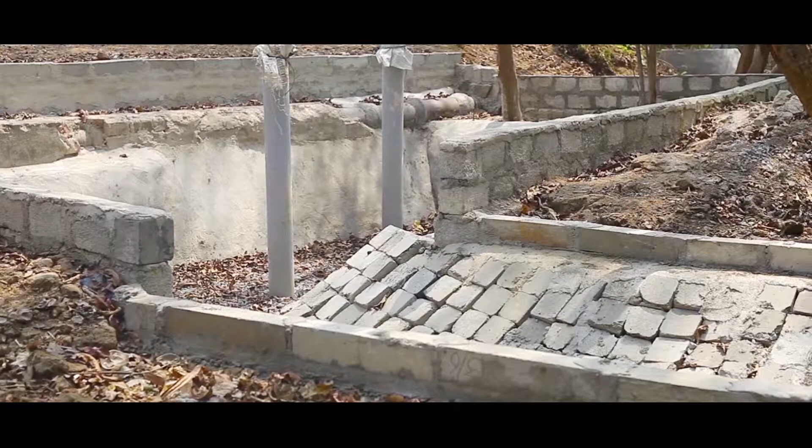Water, water everywhere, not a drop to drink. Isn't this what we feel after the rains? Puddles and water-filled potholes only make us wish that we could make use of the precious water. Actually, we can. Rainwater need not be wasted.

Rainwater harvesting is the best way for using the rainwater. In the last decade or so, the distribution of rainfall in many parts of the country has been erratic and uneven, which causes water scarcity conditions in many parts of the country, due to which water is not sufficient for drinking, household, agriculture, industries, and other purposes. Also, the groundwater levels in many states have been depleting.

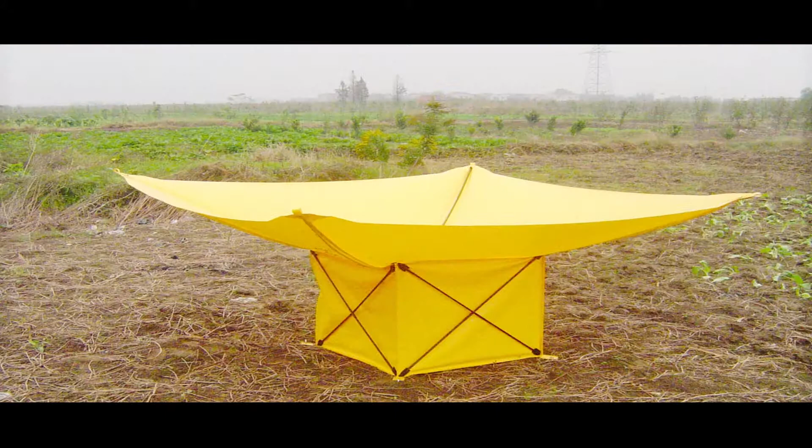We cannot produce water, but one thing is possible: that is to harvest the available rainwater, preserve it, save it, recharge it, conserve it, store it, and use it after proper treatment.

As we are all aware, 18% of the world population is in India, but we have only 4% of water resources. Whereas if you take into consideration the utilization of water, more than 30% of the water is being utilized in India. This, if you take into account, is a huge utilization in India.

Because of urbanization, industrialization, and explosion of the population, the pressure is on the water resources, more particularly the groundwater resources.

Mostly our huge resource available, the largest resource available in the world, is groundwater, but utilization day by day is increasing tremendously. The pressure is very high on groundwater.

Because of overutilization and excess utilization of groundwater resources, there are two kinds of problems arising out of it. One is the declining groundwater levels, and the other is the deterioration in quality of groundwater.

Because of these problems, the Ministry of Water Resources, Central Groundwater Board, is taking up so many artificial recharge structures to control the groundwater level decline and improve the groundwater quality. In this regard, during the 11th plan period, 100 crores has been allocated for demonstrative artificial recharge in rural and urban areas.

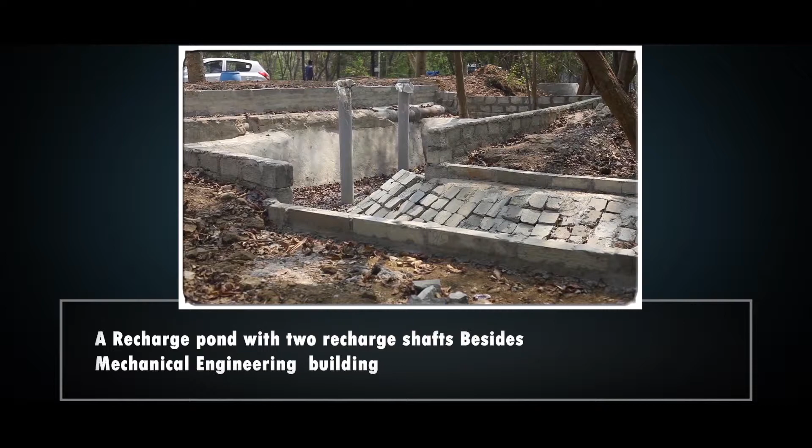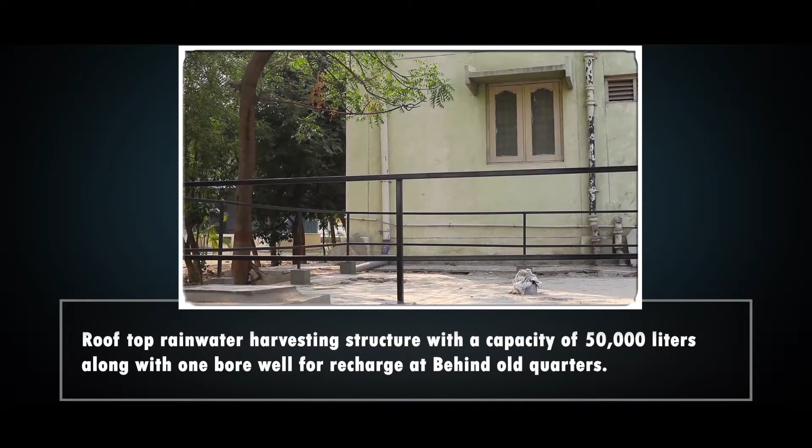Under this project, we have constructed 10 rainwater harvesting structures in the university, including 3 piezometers: a recharge pond with 2 recharge shafts beside the mechanical engineering building, a rooftop rainwater harvesting structure with a capacity of 50,000 liters along with 1 bore well for recharge behind old quarters, and another rooftop rainwater harvesting structure with a capacity of 50,000 liters along with 1 bore well for recharge at new quarters.

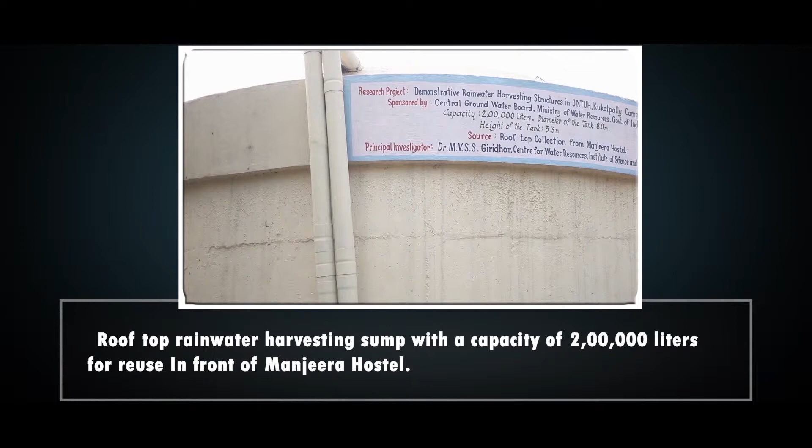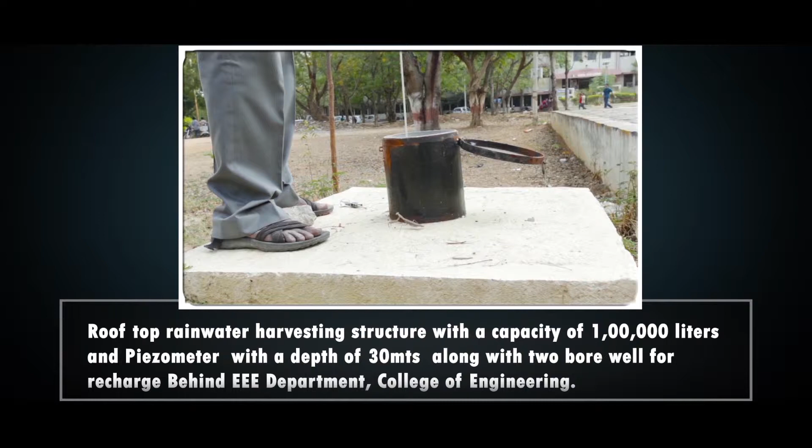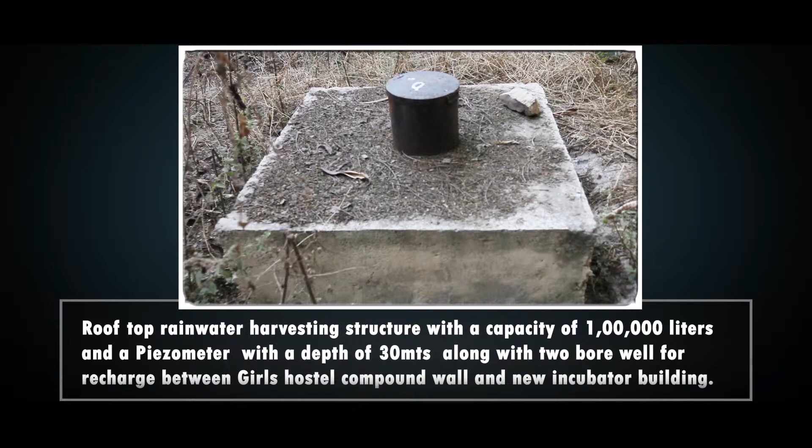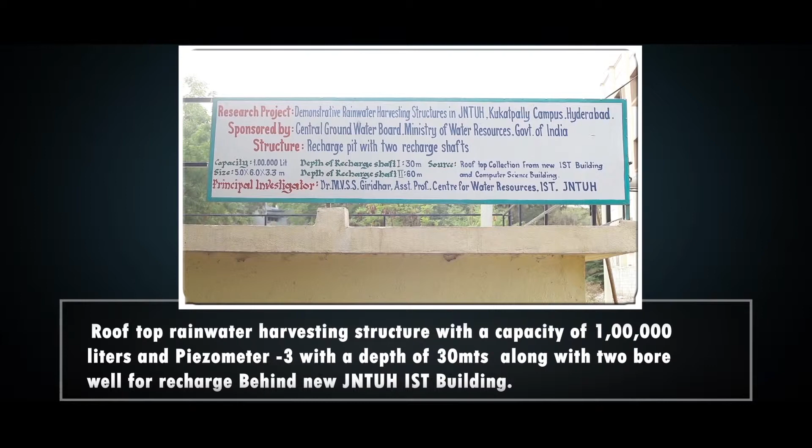A rooftop rainwater harvesting sump with a capacity of 2 lakh liters for reuse is located in front of Manjeera Hostel. A rooftop rainwater harvesting structure with a capacity of 1 lakh liters and a piezometer with a depth of 30 meters, along with 2 bore wells for recharge, is located behind the EEE Department, College of Engineering. Another structure with a capacity of 1 lakh liters and a piezometer with a depth of 30 meters along with 2 bore wells for recharge is located between the Girls Hostel compound and new incubator building. A similar structure with piezometer 3 at a depth of 30 meters along with 2 bore wells for recharge is located behind the JNTUH IST building.

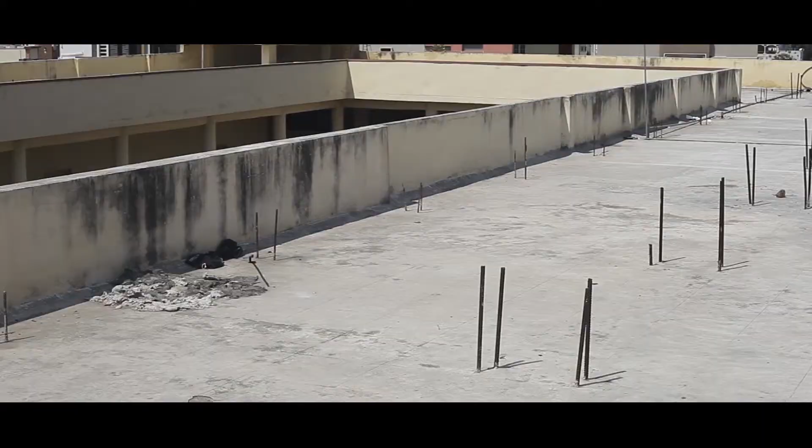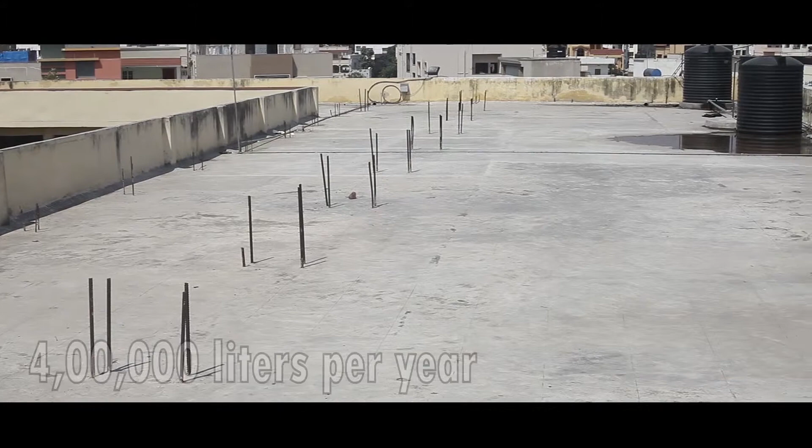Manjeera Boys Hostel building has a rooftop area of 620 square meters. The rainwater falling on the roof of this hostel is directed to the circular storage tank of 2 lakh liter capacity. The rainwater available from the roof of the building alone is about 4 lakh liters per year. The water is made to flow through PVC pipes of 4-inch and 6-inch diameter into the tank.

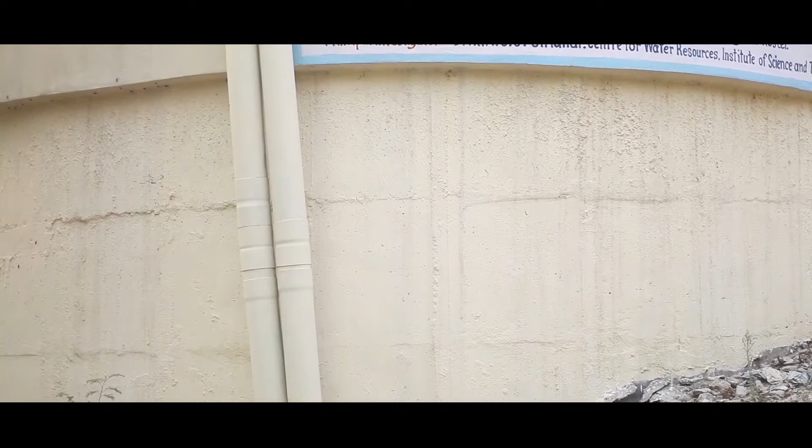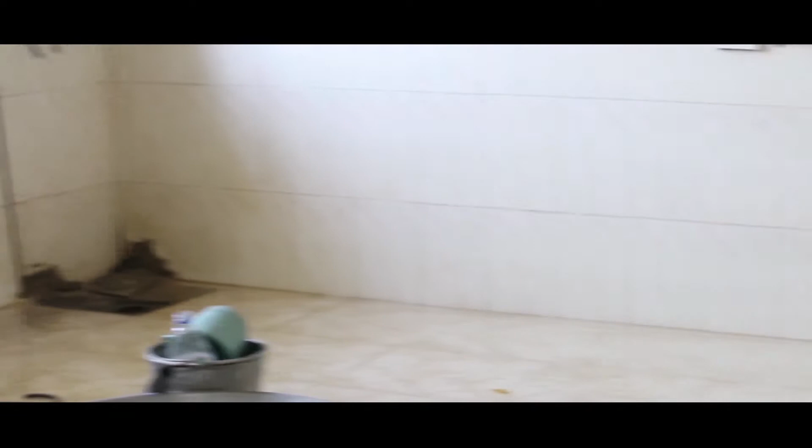A proper filtration system has been made at the inlet point of the storage water tank. The water stored in the tank is used for domestic purposes of the students residing in the hostel.

Technical specifications of the 2 lakh liter structure located in front of Manjeera Hostel, JNTUH campus: Capacity of the tank - 2 lakh liters. Diameter of the tank - 8 meters. Height of the tank - 5.3 meters. Rooftop area - 620 square meters. Maximum rainwater that can be harvested in a year - 4 lakh liters. PVC pipeline used - 4-inch and 6-inch diameter.

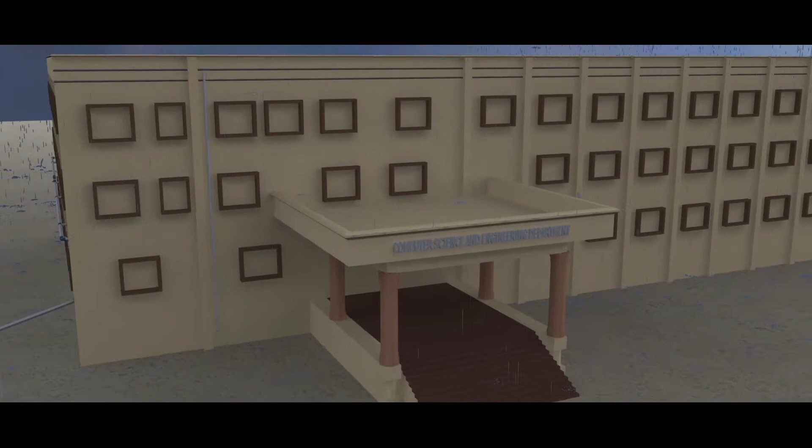Rainwater falling on the roofs of 11 buildings situated in the university campus is collected through PVC pipes of different diameters through telescopic design. After proper filtration, water is allowed to store in the sumps. In each structure, recharge wells are established in the sumps to inject water into confined and unconfined aquifers directly.

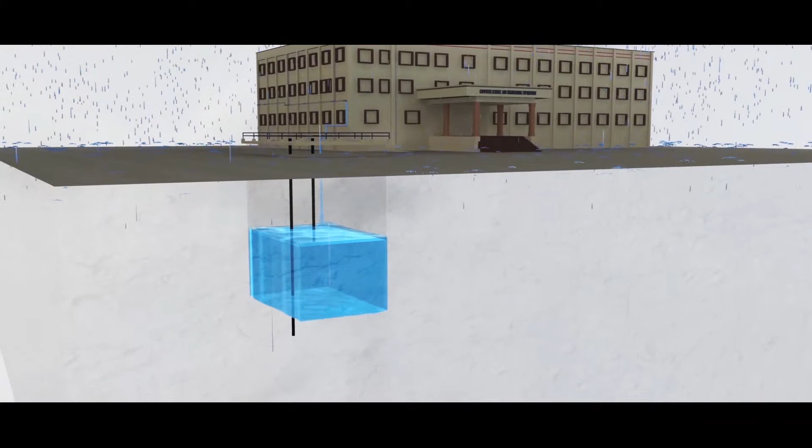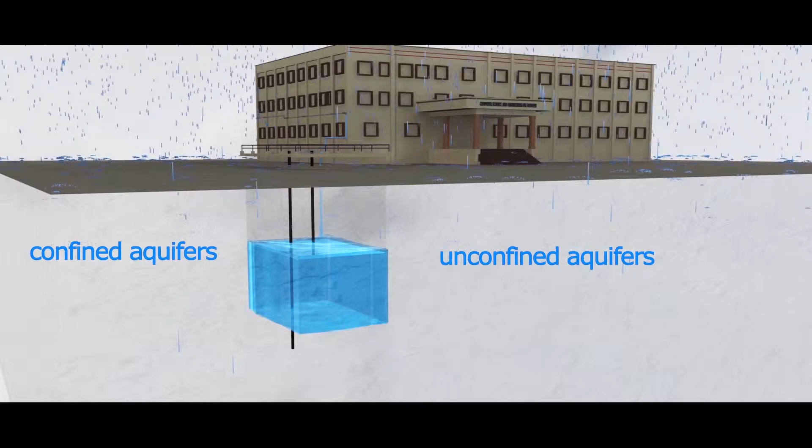The diameter of the recharge shaft is 200 mm. These wells are used to recharge both confined and unconfined aquifers situated at various depths below the ground surface. These recharge shafts are more beneficial for deep depleted aquifers and also where economy of space is an important criteria.

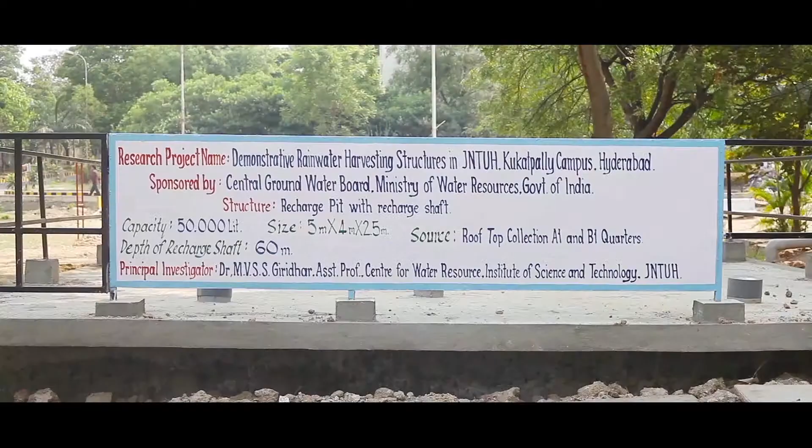A total of 5 rainwater harvesting structures were established in the campus in Phase 1 and Phase 2 of the project for recharge purposes. The technical details about these structures are explained in the following video.

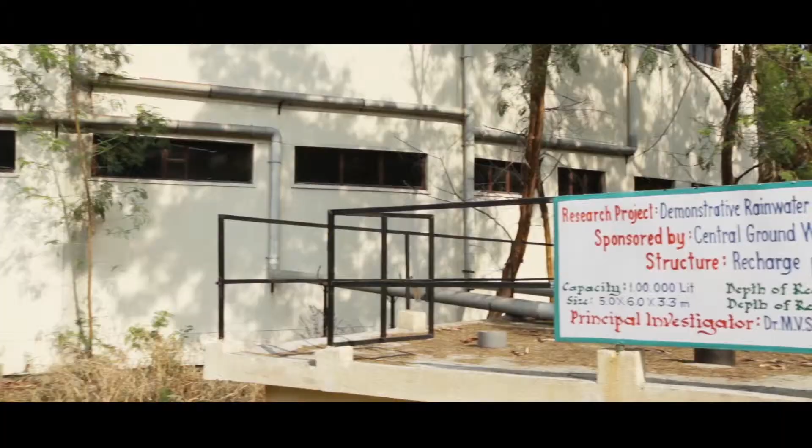Recharge structure with a capacity of 1 lakh litre along with 2 recharge shafts in the tank for percolation is located behind the EEE Department, College of Engineering, JNTUH, which covers the rainwater coming from the buildings of Civil Engineering and Library. Total rooftop area is 1020 square meters. The rainwater available from the roof of these buildings is about 6.60 lakh litre per year.

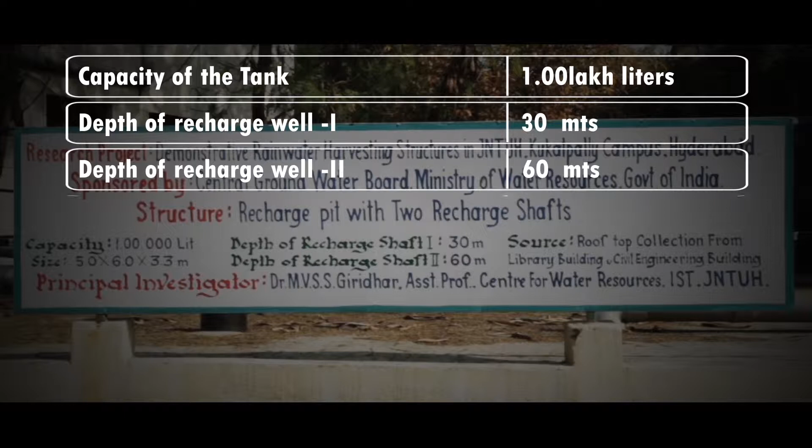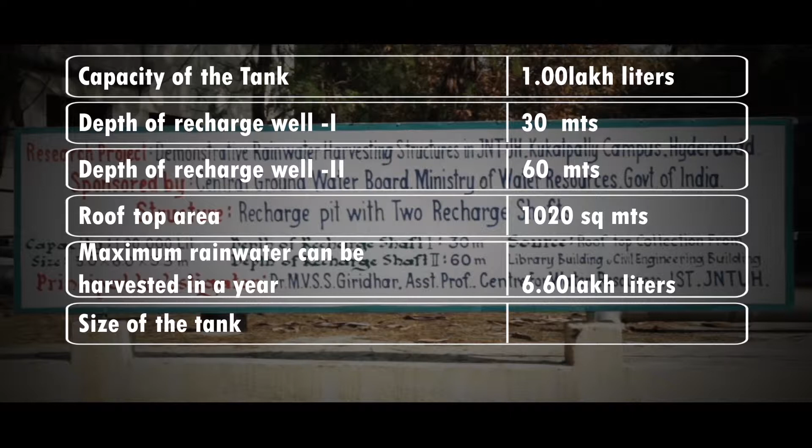Technical specifications of the 1 lakh litre structure located behind the EEE building: Capacity of the tank - 1 lakh litre. Depth of recharge well 1 - 30 meters. Depth of recharge well 2 - 60 meters. Rooftop area - 1020 square meters. Maximum rainwater that can be harvested in a year - 6.60 lakh litres. Size of the tank - 5 meter into 6 meter into 3.3 meter. PVC pipeline used - 4-inch and 6-inch diameter.

Recharge structure with a capacity of 1 lakh litres along with 2 recharge shafts in the tank for percolation is located between the Girls Hostel compound wall and new incubator building, JNTUH, which covers the rainwater coming from the Girls Hostel building. Total rooftop area is 1282 square meters. The rainwater available from the roof of the building is about 8.30 lakh litres per year.

Stages of construction.

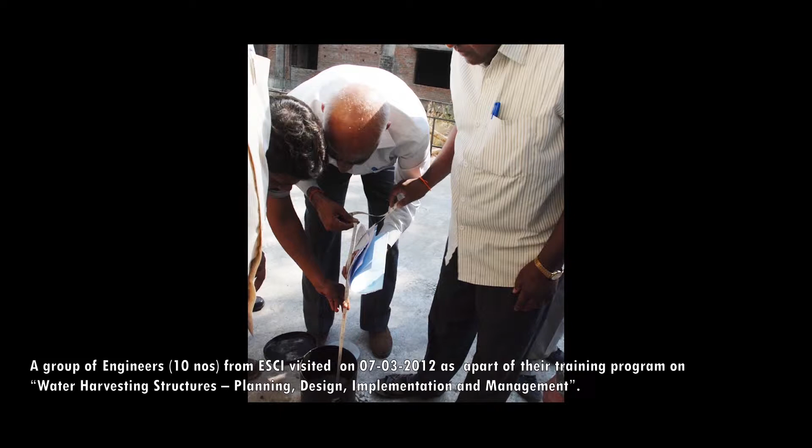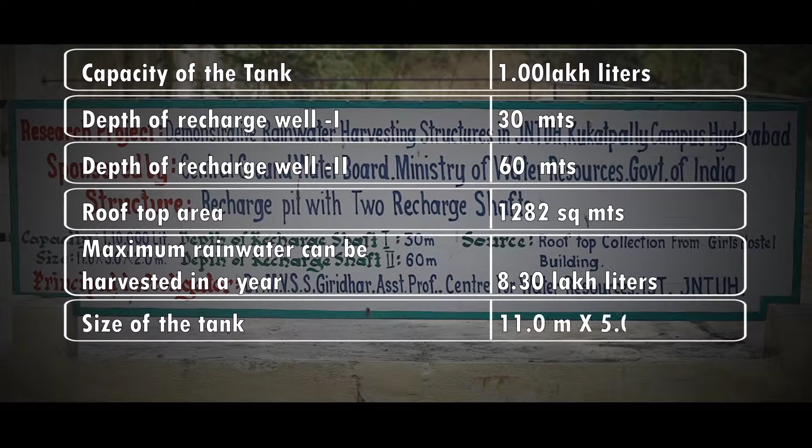Technical specifications of the 1 lakh litre structure located between Girls Hostel compound wall and new incubator building: Capacity of the tank - 1 lakh litres. Depth of recharge well 1 - 30 meters. Depth of recharge well 2 - 60 meters. Rooftop area - 1282 square meters. Maximum rainwater that can be harvested in a year - 8.30 lakh litres. Size of the tank - 11 meter into 5 meter into 2 meter. PVC pipeline used - 4-inch and 6-inch diameter.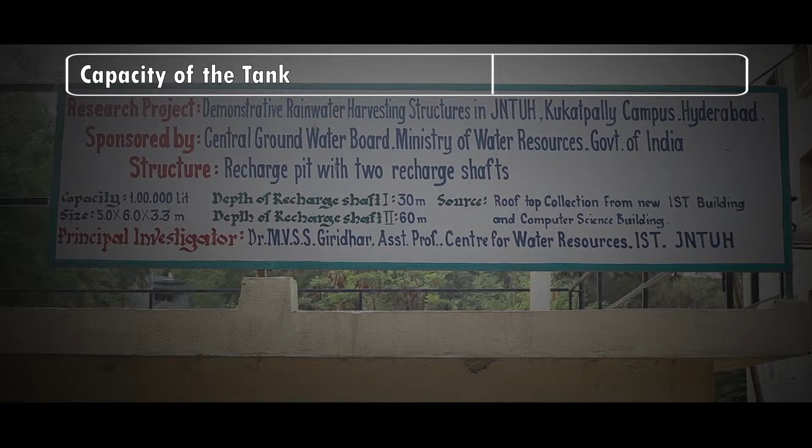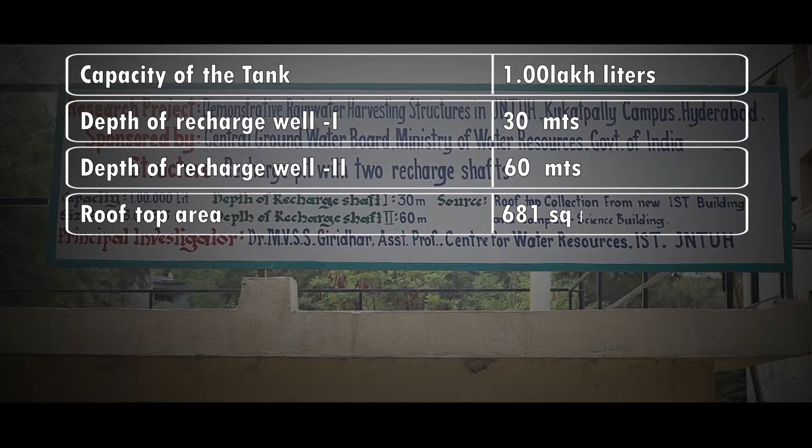Depth of recharge well 1: 30 meters. Depth of recharge well 2: 60 meters. Rooftop area: 681 square meters. Maximum rainwater that can be harvested in a year: 4.50 lakh litres. Size of the tank: 5 meter into 6 meter into 3.3 meter. PVC pipeline used: 4-inch and 6-inch diameter.

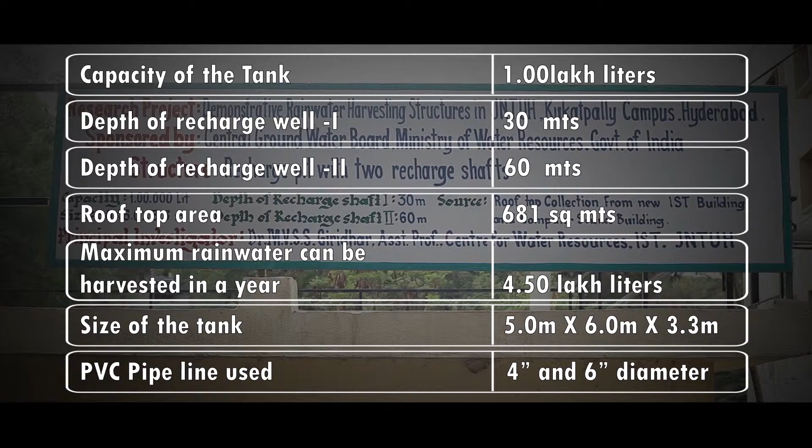A recharge structure with a capacity of 50,000 liters along with one recharge shaft in the tank for percolation located between new quarters JNTUH, which covers the rainwater coming from the buildings of B5, A3, RSQ1 and RSQ2 quarter buildings. Total rooftop area is 2216 square meters. The rainwater available from the roof of these buildings is about 14.36 lakh liters per year.

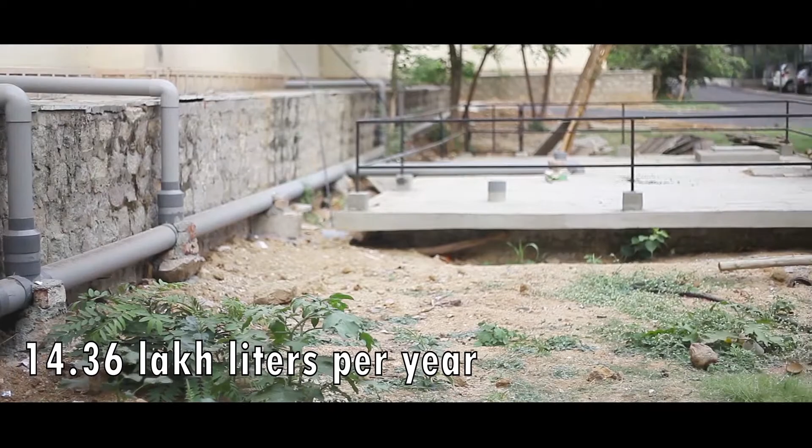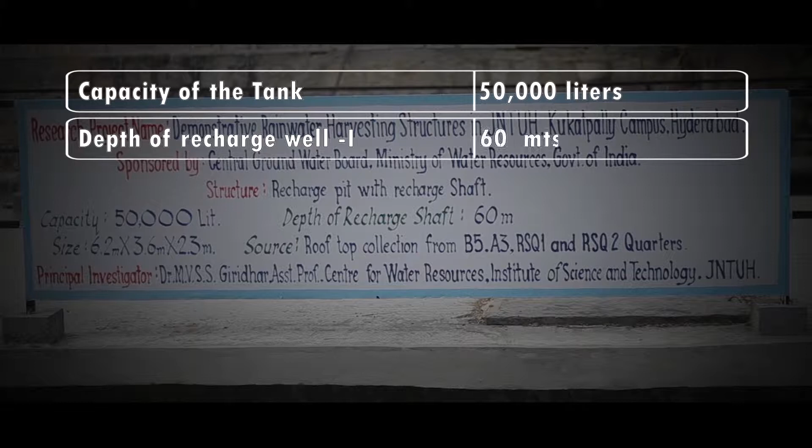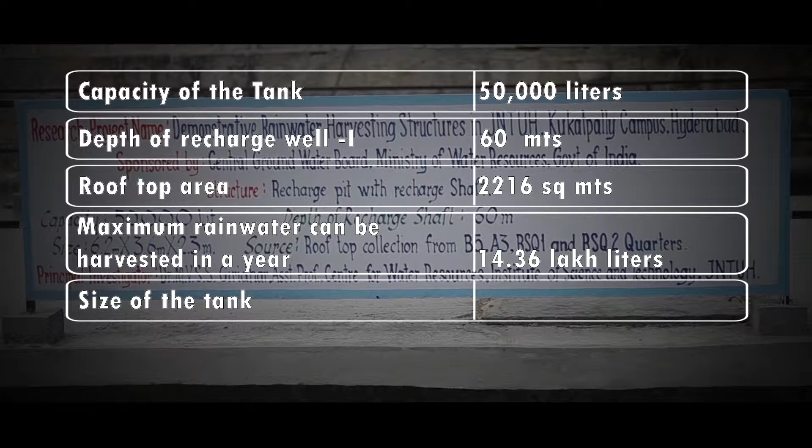Technical specifications of 50,000 liter structure located behind new quarters JNTUH. Capacity of the tank: 50,000 liters. Depth of recharge well 1: 60 meters. Rooftop area: 2216 square meters. Maximum rainwater that can be harvested in a year: 14.36 lakh liters. Size of the tank: 6.2 meters into 3.6 meters into 2.3 meters. PVC pipeline used: 4-inch and 6-inch diameter.

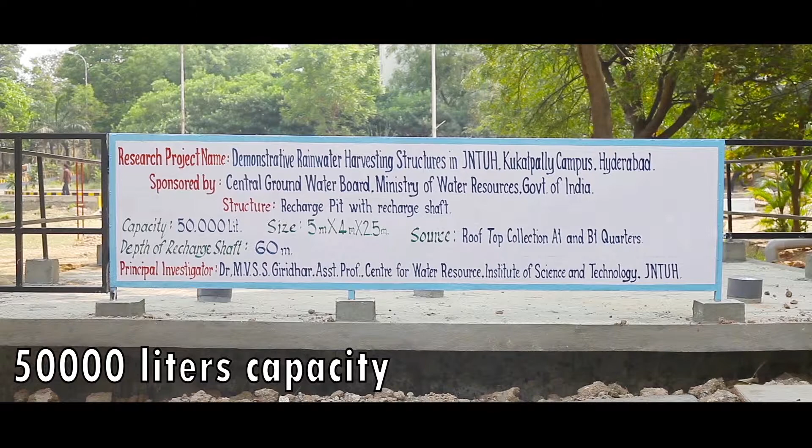Recharge structure with a capacity of 50,000 liters along with one recharge shaft in the tank for percolation located behind old quarters JNTUH, which covers the rainwater coming from the A1 and B1 quarters buildings. Total rooftop area is 975 square meters. The rainwater available from the roof of this building is about 6.50 lakh liters per year.

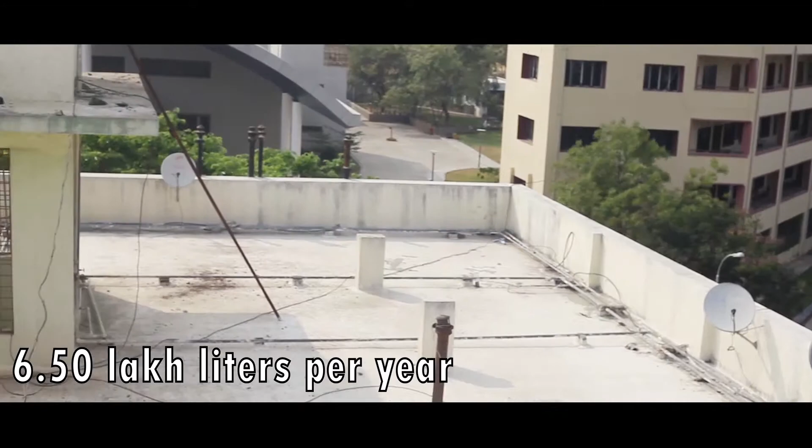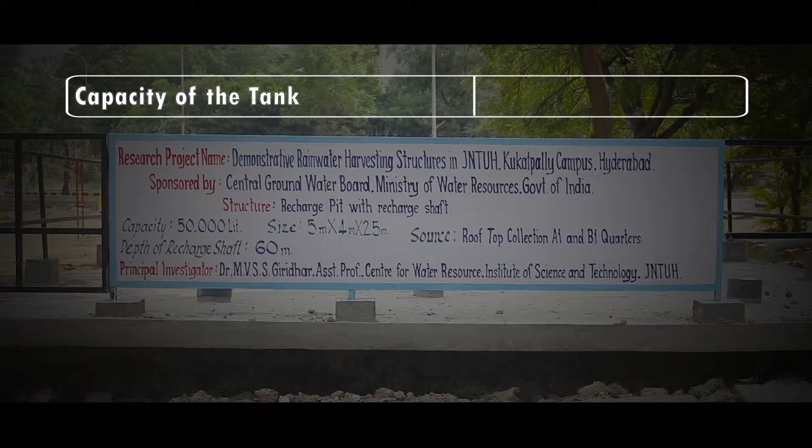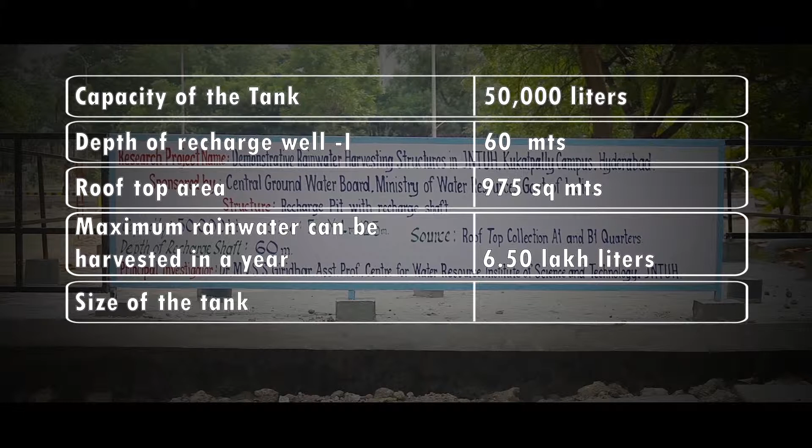Technical specifications of 50,000 liter structure located behind old quarters JNTUH. Capacity of the tank: 50,000 liters. Depth of recharge well 1: 60 meters. Rooftop area: 975 square meters. Maximum rainwater that can be harvested in a year: 6.50 lakh liters. Size of the tank: 5 meter into 4 meter into 2.5 meter. PVC pipeline used: 4-inch and 6-inch diameter.

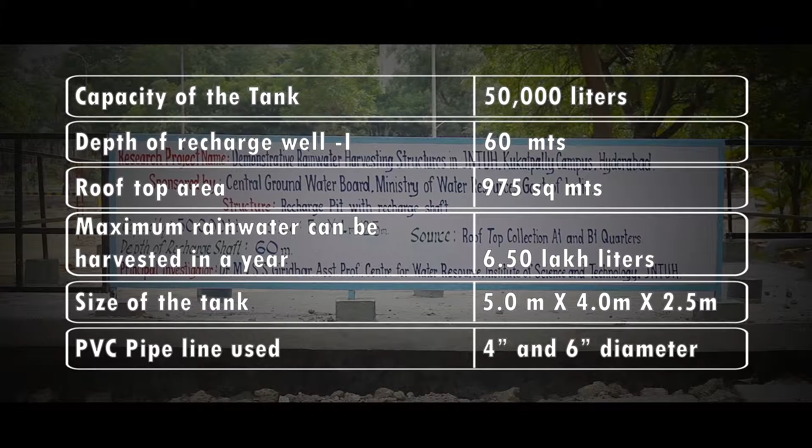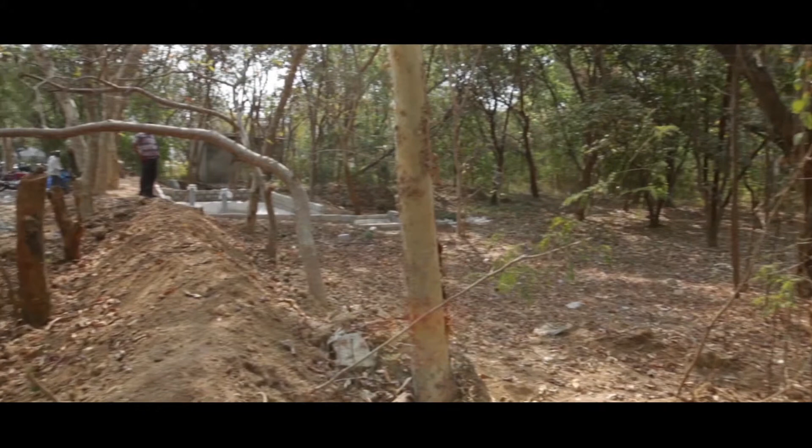There are 3 distinct watersheds covering JNTUH campus from which surface runoff is harvested for recharging the groundwater aquifers. Recharge pond with silt trap, inlet and outlet is constructed near Mechanical Engineering Department. Filtration bed is provided at the bottom surface of the pond. Rainwater will enter into the recharge shaft after proper filtration through filter media. 2 recharge shafts are also established within the recharge pond. The diameter of recharge shaft is 6-inch. These wells are helpful in recharging aquifers at various depths below the ground surface.

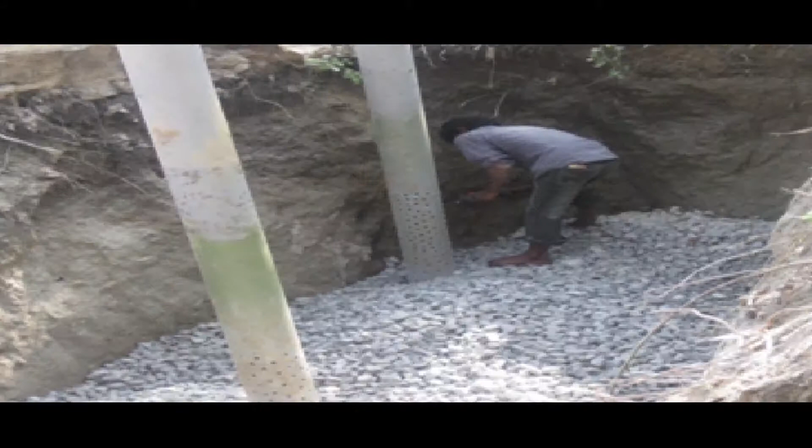All the above rainwater harvesting structures have been funded by Ministry of Water Resources, New Delhi, Government of India through the Central Groundwater Board Southern Region, Hyderabad, under Central Sector Scheme, Groundwater Management and Regulation. All the rainwater harvesting structures constructed under this scheme are currently functioning at the JNTUH University campus, one of many measures taken by the organization to create awareness about the conservation of rainwater. This is an important step in the right direction. Conservation of water is essential not only for the present but also for our future. Water is our lifeline. Remember, catch every drop of water when it falls on a rainy day.

The JNTUH authorities are monitoring the quality and quantity of groundwater in the campus. With the existing rainwater harvesting structures, we can collect around 75 lakh liters of rainwater in any normal rainfall year. Last year, after completion of the structures, we collected about 26 lakh liters of rainwater. The JNTUH authorities have collected 4 lakh liters of rainwater and used it for the students of Manjeera Hostel. The authorities have observed 7.5 meter rise in the static groundwater level in the piezometers at different locations in the campus.

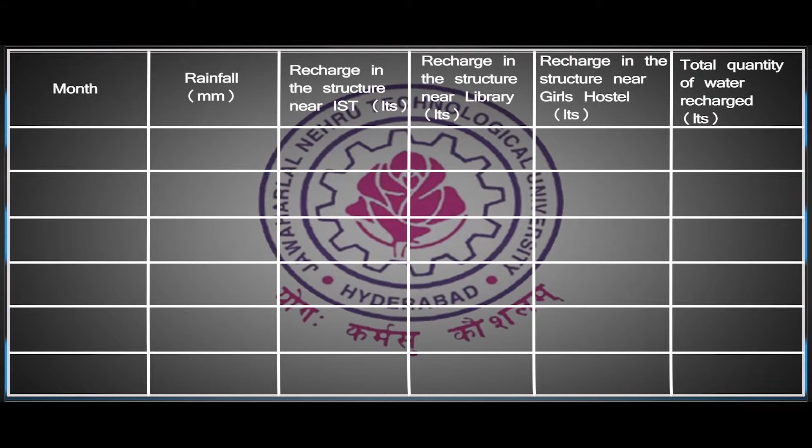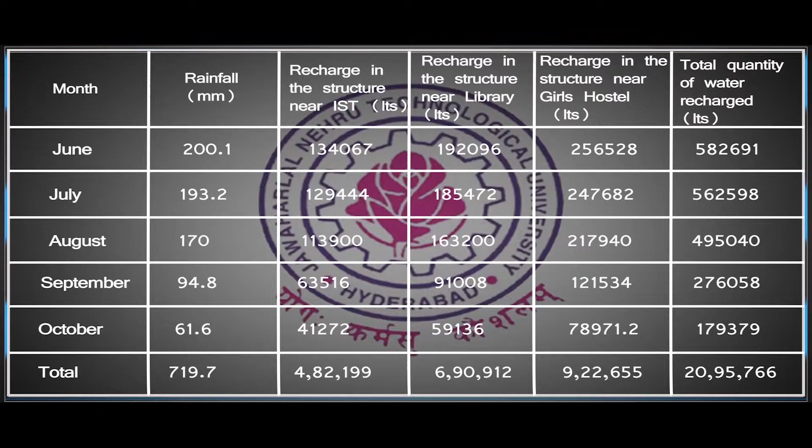Water levels measured in the 3 borewells on daily basis during the monsoon period were found to be 22.6, 23.6, 10.1 meter on 15 June 2012, and the corresponding water levels have improved to 14.63, 16.46, 3.35 meter respectively on 1st October 2012; a corresponding rise of 7.97, 7.14 and 6.75 meter in groundwater levels has been registered, indicating significant improvement of groundwater levels. The monthly recharge in the structure of JNTUH campus due to the rainwater harvesting is as follows. Monthly use of harvested rainwater through the recharge structure at JNTUH campus.